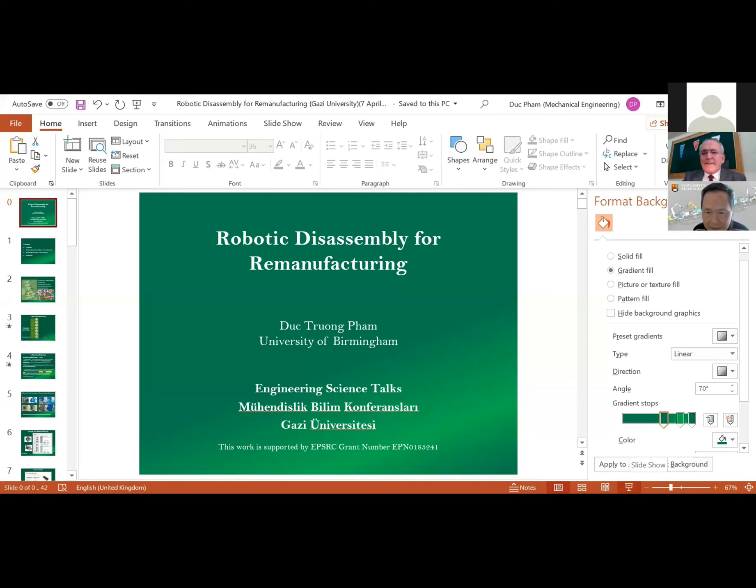Thank you, very good. I'd like to start sharing now the screen. Please bear with me. So this is the one, and I need to be sure that I also share the sound. Okay, that's good. Now share. Can you see my screen yet? Yep. Okay, I will make it large now. Takes a bit of time. Can you see it now? Yeah, fantastic, thank you.

Merhaba, I still remember some Turkish. Merhaba, dear Professor. Thank you very much for asking me to make this presentation, Sharif. It's my pleasure to speak to you and your faculty.

The presentation is quite a simple one. Let me just tell you the structure. I don't know why it is not moving.

Let me see, I don't know. It seems, yeah, there we are. So it has 4 parts. The introduction is very brief, the preamble is very brief. Then I start to explain what remanufacturing is, and very briefly what smart remanufacturing is. Then I talk about the project we've been working on, to do with robotic disassembly, and I'll explain the relationship between that project and remanufacturing, and then finally conclude. I've given about 40 to 45 minutes for the presentation, as Sharif explained to me before, so if I exceed this time, please stop me. Yeah, thank you, very good.

So let me see, I will also start the clock. I have a clock, yeah, there we are. Right, so it seems that my presentation seems to be stuck a bit. I don't know why. Yeah.

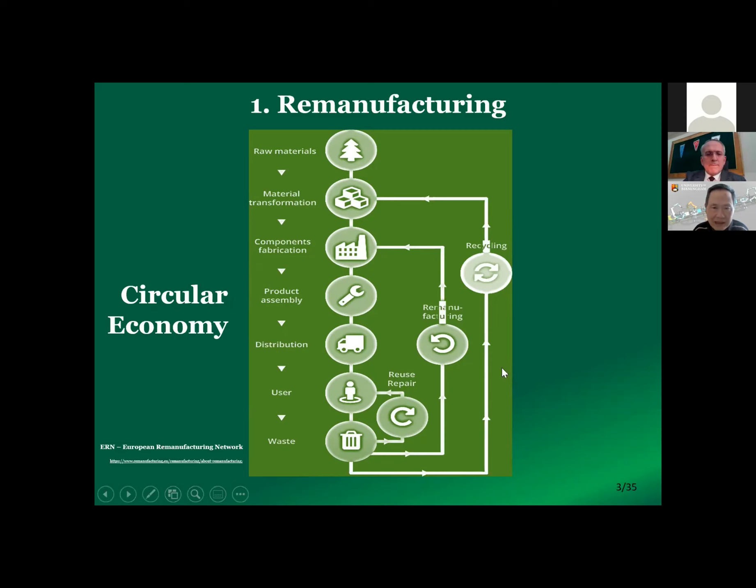So what is remanufacturing? This is the definition in the British Standard: it is the process of returning a product to at least its original performance, with a warranty that is equivalent to or even better than that of the newly manufactured product.

This is not what you're probably familiar with, which is reconditioning. When you recondition a product, you bring it to a working condition, but it won't necessarily be as good as a new product. Here, you bring the product to at least as good as new.

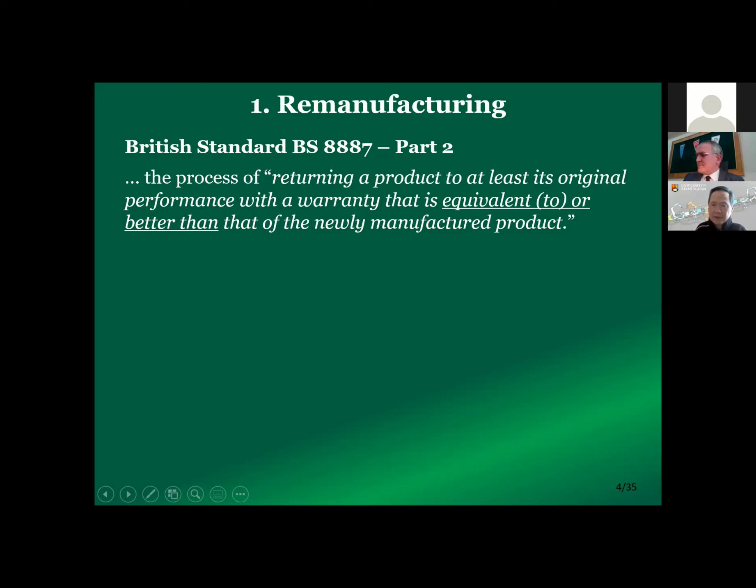This is another definition of remanufacturing according to the American standard. It says like new or better than new. These are the highlighted words: like new or better than new.

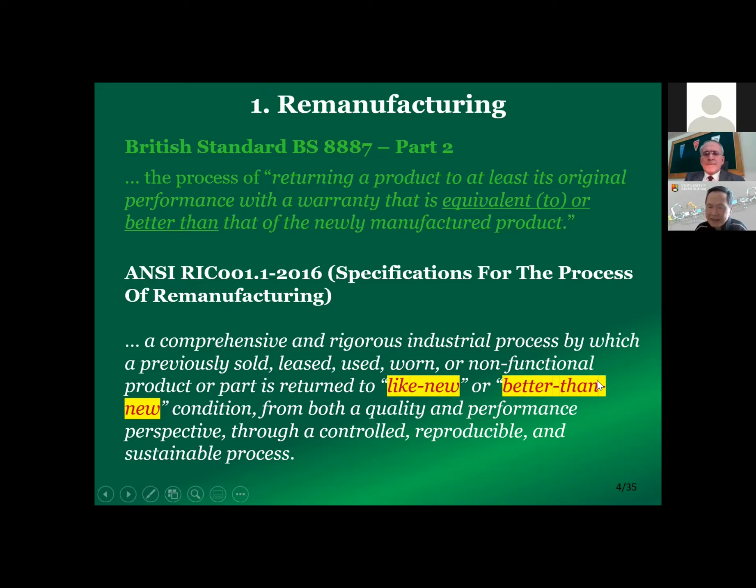So here are some examples of remanufactured products. We have a piece of pipe here, and after remanufacture, it becomes like this - it looks like new. Here, another piece of equipment as new, a pump as new, and so on. A piece of electronic equipment as new.

Or maybe inside you have a new processor, a processor that is of a new standard. Instead of an i5, now you have an i7 chip, and therefore this product is better than the original product that had the i5 chip in it. Some people might wonder why a remanufactured product can be better than the original. Well, it's better because some components in it are better than the original components.

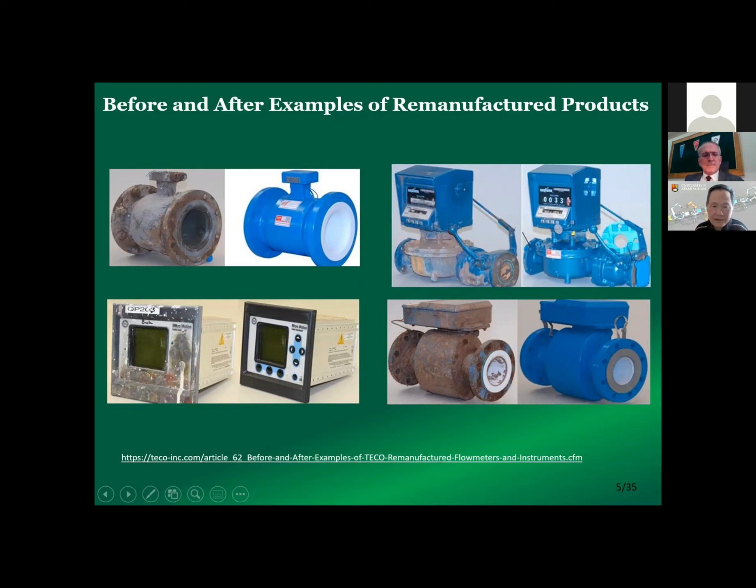So why do we want to do remanufacturing? We heard a little bit about it before, but here is some statistics for you.

This is some data taken from a book by Steinhilper, written just over 20 years ago. He compared the energy required when remanufacturing alternators and manufacturing alternators from new. If manufacturing an alternator from new requires 100% of energy, then remanufacturing only requires 14%, or even 9% in some cases. Alternators are 14%, starter motors are 9%.

In terms of material consumption, if raw materials to produce new alternators or new starter motors represent 100% of the material, then in remanufacturing you only need 12%, or 11% in the case of starters - let's say around 10%. So a big reduction in energy and in raw material requirement.

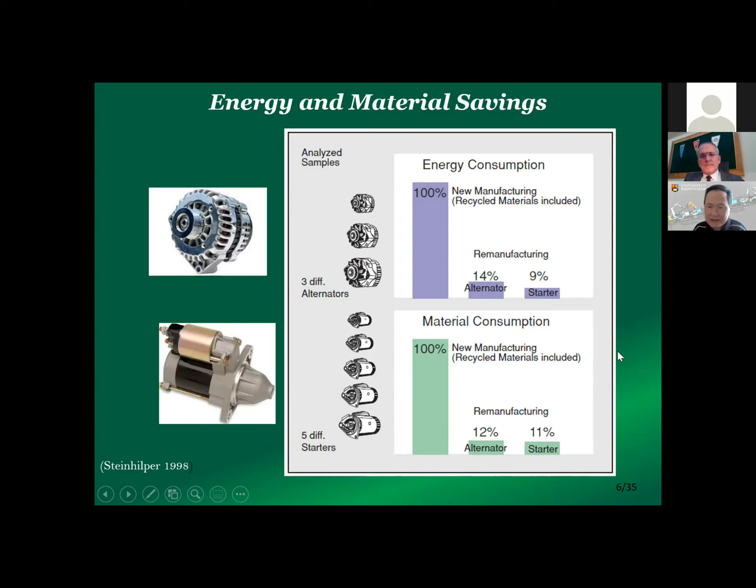Here is a concrete example. Caterpillar is a partner in our project - a big American company making earth-moving equipment and building equipment and so on. You can see the kinds of savings they can make: in terms of water use, 93% less water; energy, more than 80% less; and material, 90% less.

More savings: landfill - normally when you dispose of a product, you have to bury it in the land, you need the land to bury it in. Landfill space needed is now more than 90%, more than 99% less, so you only use 1% of the landfill that is needed. In terms of greenhouse gas emission, 61% less. So a lot of savings for the environment, for resources, and so forth. That makes sense - that's why we need to do remanufacturing.

My thing is stuck again. I don't know why, Sharif.

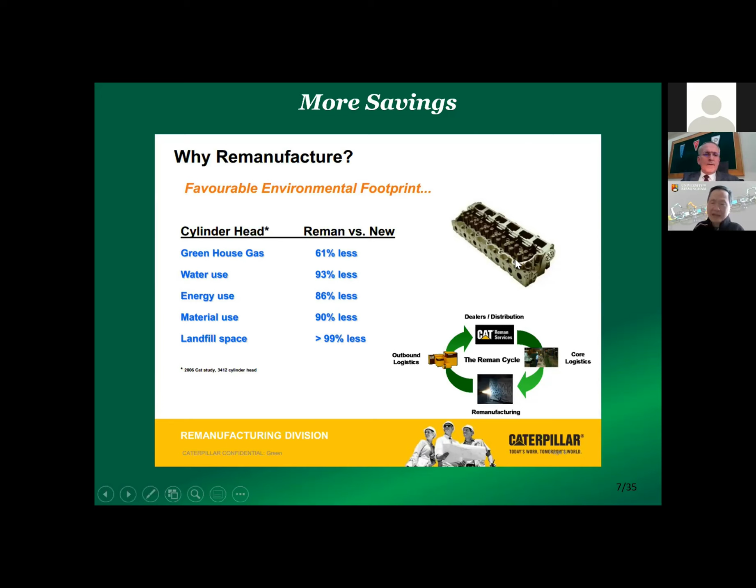So I will look at some issues in remanufacturing. The key issue, as I mentioned, is uncertainties. There's supply uncertainty - you don't know the quality of the product you bring back, you don't know the quantity, you don't know how many motors are coming back today or tomorrow, and you don't know the timing, whether they come this month or next month. You don't know at all.

This is a problem for remanufacturing, because you don't know the condition of these products, you don't know how much effort you need to repair or remanufacture them, you don't know the time required, so you cannot estimate when the new remanufactured product will be available. You don't know how much it will cost, because that depends on the remanufacturing effort - if you need to put a lot of time in or replace a lot of components, the remanufactured product will cost more. So all that poses problems for remanufacturing.

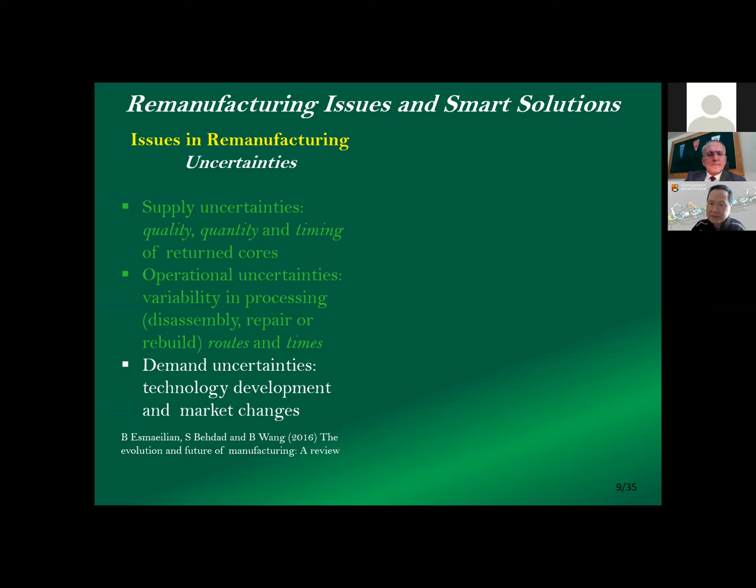Now, smart remanufacturing is about overcoming these uncertainties. You can overcome them by using sensors - you embed sensors in products to monitor the condition of the product continuously during its use. Because of that, you know when the product will come near the end of its life, so you can predict the life of the product and when it will become available for remanufacturing.

And then you have also a complete record of the life cycle of the product, how it has been used. Therefore you can know that certain bearings will need to change, certain components will need to be repaired, a shaft is nearly broken and you need to repair or replace it. So this reduces uncertainties and makes life easier for remanufacturers.

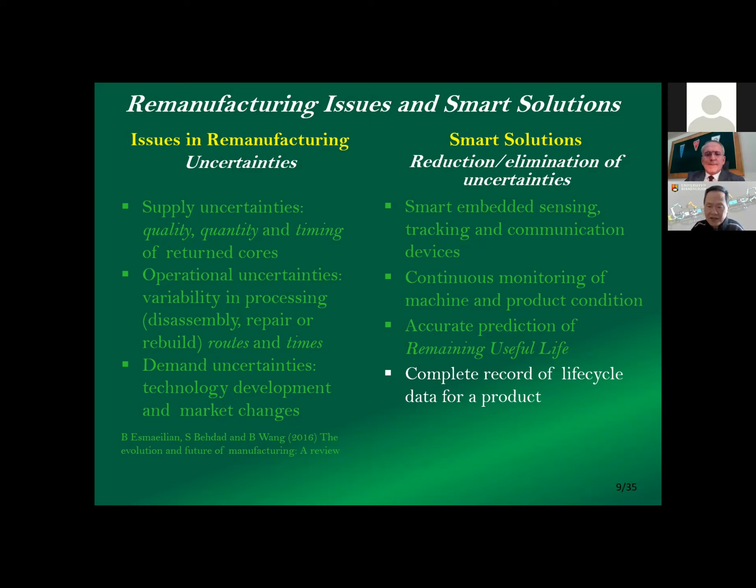Now let's look into a typical remanufacturing process. Here is the end-of-life product, the product that has reached the end of its life. The first operation that happens is that the product is disassembled. You take it apart, you break it down, then you clean it thoroughly, then you inspect the different components.

Then those components that are repairable, you repair them. Let's say if there is a bit of wear in the component, you can build it up using additive manufacturing. Or if you cannot repair it, you can replace it with a new component, but hopefully the replacement is not too expensive—you don't have to replace too many components. The most expensive components you can reuse, so that makes life easier and costs less.

Then after you have got all the components, either new, repaired, or completely reused, you can reassemble them. After you have reassembled the product, you test it thoroughly, putting it through the same test regime as a new product would go through. After the test regime, you can dispatch the product for reuse, for people to use—you can sell the product to customers again. At this point, the product is like new and has a warranty as a new product.

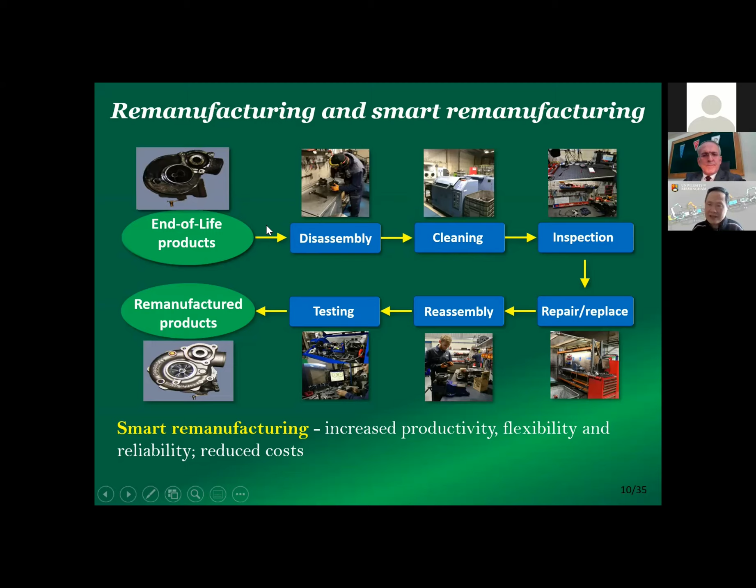I have this slide, and I would like to ask people in the audience to think about it and tell me—let's say Sheriff, can you tell me what I'm trying to show here.

Okay, now I open the microphone. What you are doing—are you assembling, new manufacturing? No, it's just repairing, maybe just replacing or something. Just trying to understand the video.

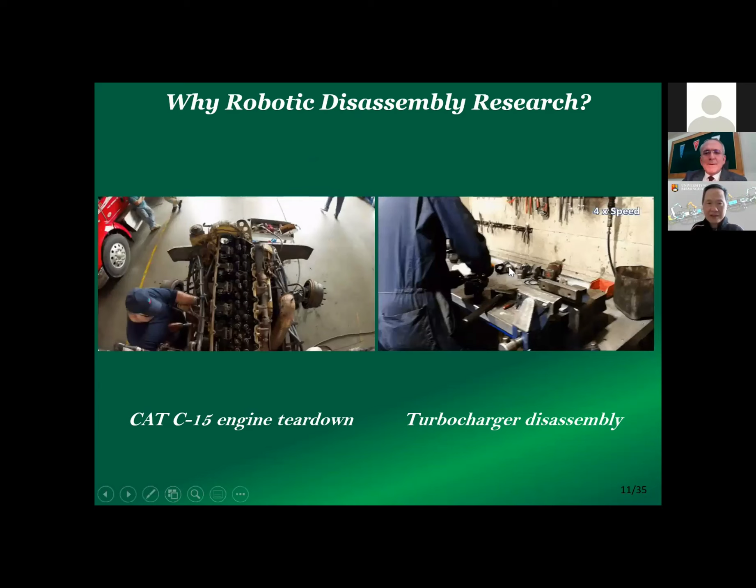Yeah, okay. So I'm showing the disassembly—this person is disassembling a turbocharger. These people are disassembling a big engine, a big engine. You can see the size of the people compared to the engine, and you can see that this requires a lot of effort, a lot of manual work, a lot of people, a lot of effort. This is very skilled—the person does a very skilled job.

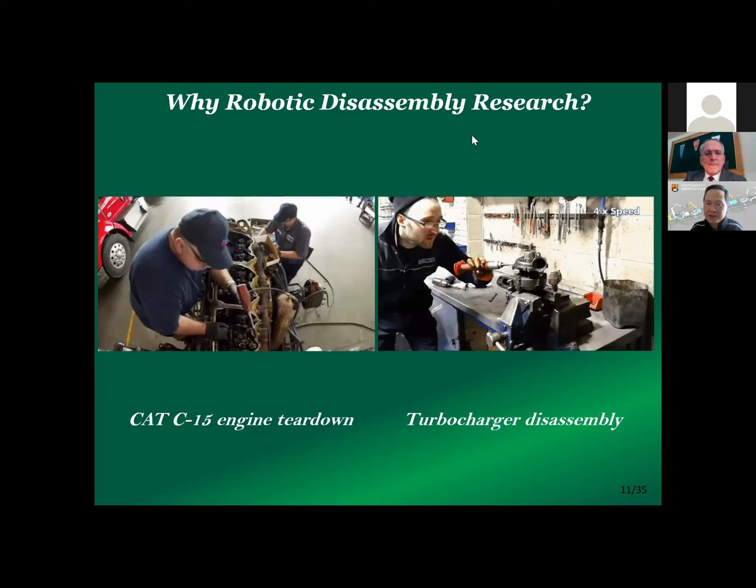So disassembly is a difficult operation that requires a lot of manual labor. This is what makes remanufacturing currently not completely automatable—you cannot automate disassembly, you cannot make remanufacturing autonomous. Our research program, called Auto Reman, stands for Autonomous Remanufacture, and we address the problem of disassembly—the problem shown on the previous slide, with a lot of people being used and a lot of skills being required.

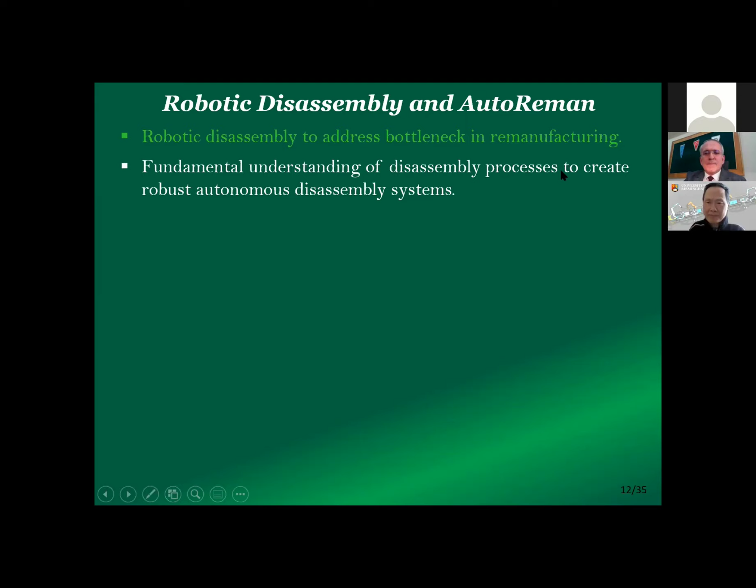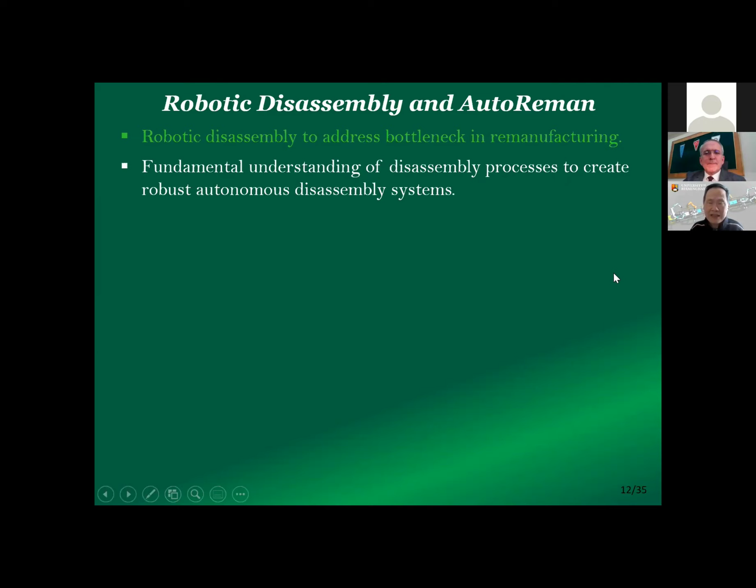This is a 5-year project, and we adopt a fundamental approach to it—we want to study the science. This is why this talk fits your series, which is engineering science talks. We are talking about developing the science of disassembly, to understand disassembly fully. We adopt a scientific approach to studying the problem of disassembly in remanufacturing, and our project is called Autonomous Remanufacturing, or Auto Reman.

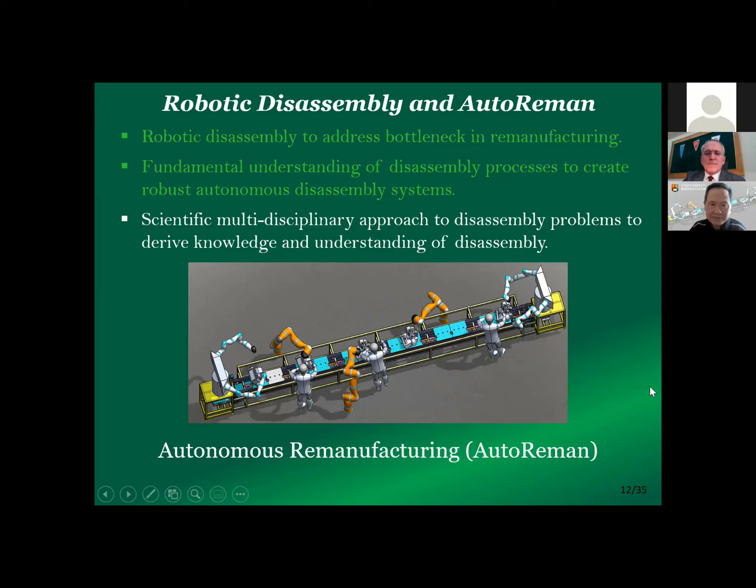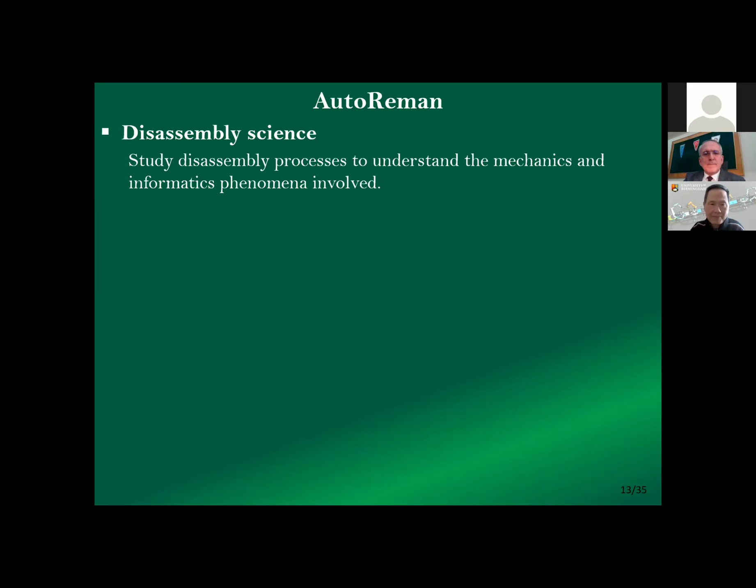So the first step of the project is to understand disassembly. To look at disassembly science, we study the individual disassembly processes to understand the informatics, the information content, and the mechanics involved. We get this understanding in order to develop practical disassembly strategies—strategies that can enable robots to perform disassembly in a reliable manner.

Because we want to have autonomous remanufacturing, we want robots to be able to plan their operations. So we study disassembly planning by robots. Now, in some cases, the original plan doesn't work, so the plan has to be done online. Replanning has to happen. If the robot is working and it finds that it gets stuck, then it has to replan the operation. So we study planning and replanning as well.

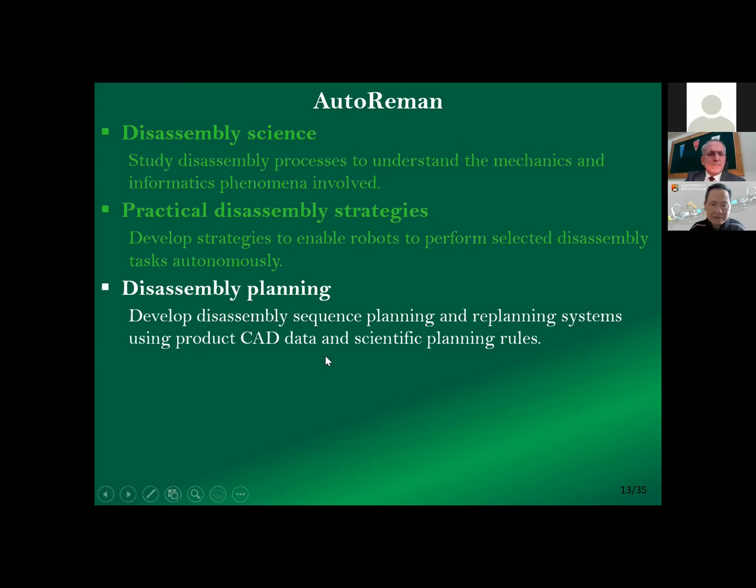It's stuck again. So collaborative disassembly. We realize that with a lot of effort, you can achieve totally autonomous disassembly, but it will cost a lot of money. So collaboration between humans and robots is necessary from an economic point of view, at least. And in some other cases, obviously, you can use robots to replace people in dangerous situations. I will return to this shortly.

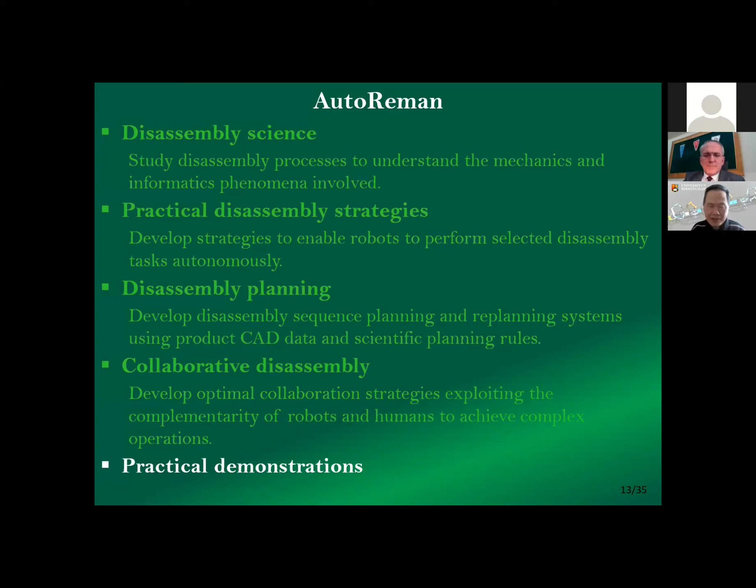But these are the 4 main parts of our project. The final part is to construct demonstrations of the strategies, techniques and tools that we developed in the previous 4 work packages. So here are the 5 work packages of our project. Our project is a 5-year project. It started almost 5 years ago, and it is in the final year. There are 6 more months to go, and I'm going to describe to you what we have achieved so far.

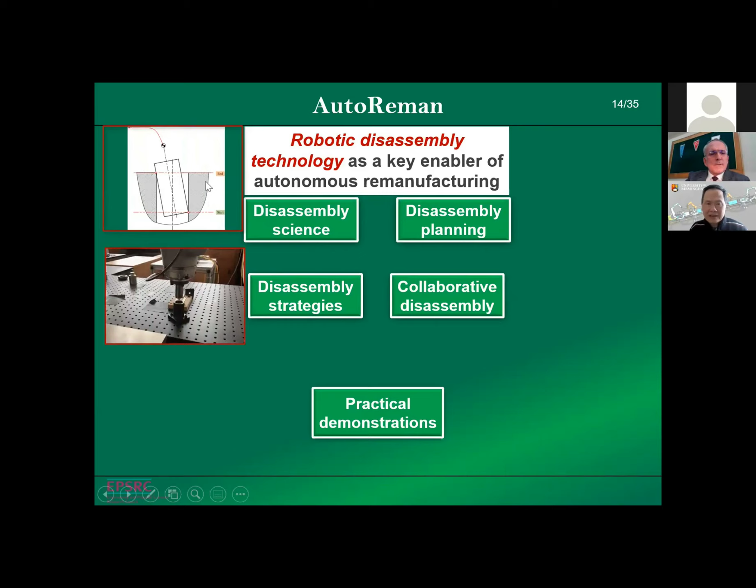So we have been studying disassembly science. We have been looking at individual disassembly processes to understand the mechanics of the processes and also the information content of these processes. We have used our understanding to develop strategies to enable robots to perform those individual disassembly operations. And as I mentioned, we've also been studying disassembly planning.

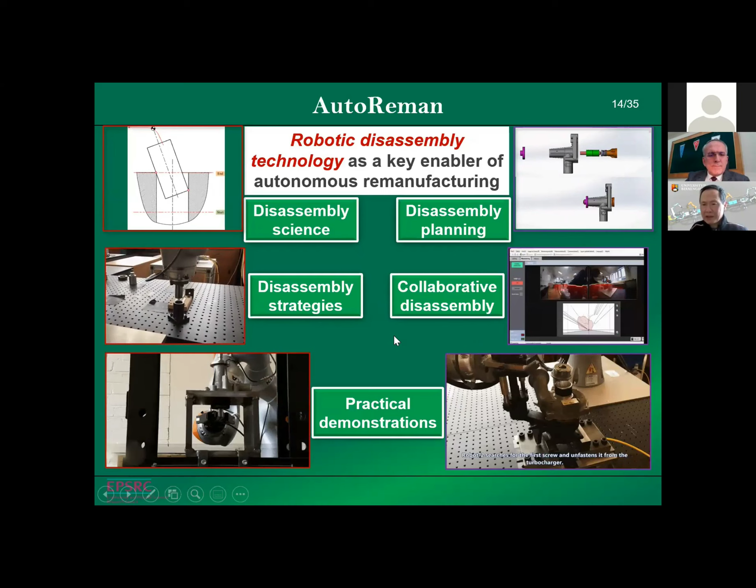Collaborative disassembly is the next piece of work. So when people and robots work together, we look at that. And then we have constructed demonstrations of our work. So I'm going to say a few words about each of these work packages.

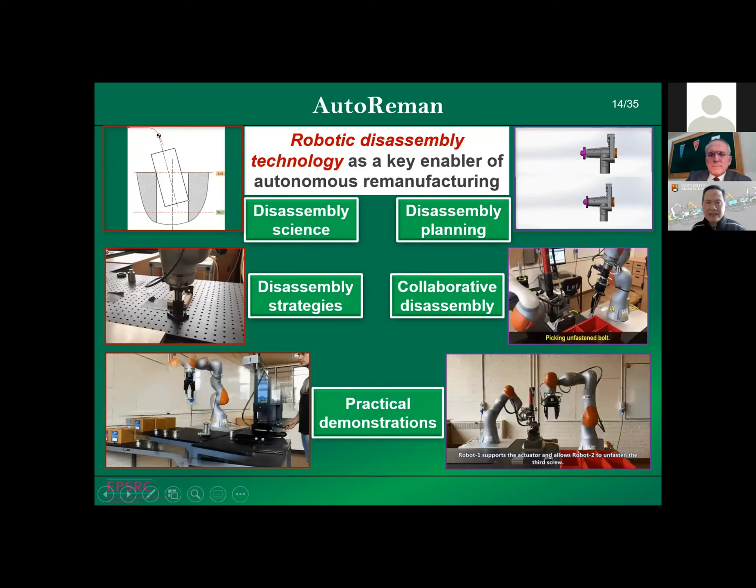Before we started the disassembly science work package, we needed to identify the fundamental disassembly operations. So we studied many products, in total more than 400 products, to see how they are disassembled and what operations are involved. So we found something like 12,000 operations.

And then we classified those operations into categories. Unsurprisingly, we found that unscrewing is the largest category. About 40% of operations involve unscrewing of some sort. So unscrewing is a fundamental operation that we will study.

We also found separation. Now, separation is a big category, it involves all kinds of operations. But there is another class, 20% of the operations involve pulling. So imagine you have a bearing that is in the housing and you pull the bearing out, pulling it in one direction, or you pull the shaft from a bearing. These operations are known as peg-hole operations. People in robotics have studied peg-hole assembly of a cylindrical peg into a cylindrical hole. Now we look at the pulling of a peg from a hole, like the operation I showed you earlier.

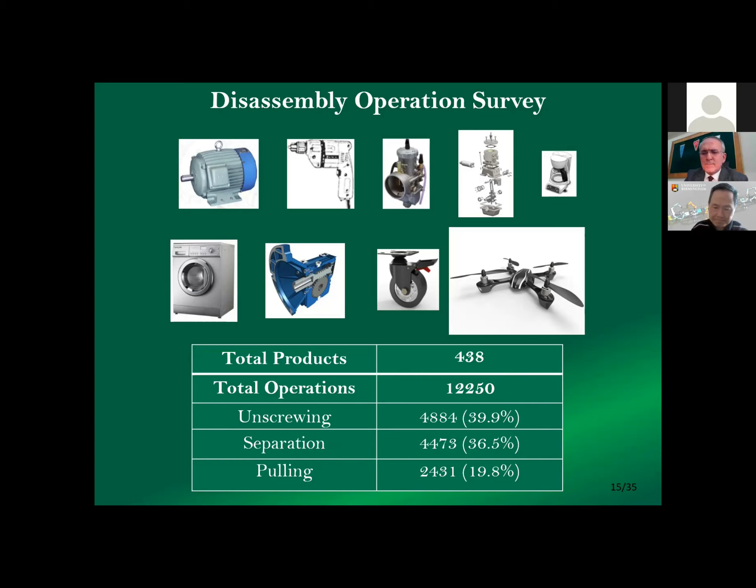We benefit a lot from studies by people who look at screwing as assembly, whereas we are interested in disassembly. When people look at screwing for assembly, they want to screw securely, and they worry about vibrations, you know, when you drive your car, you don't want vibrations to make your wheels loose. So people looked for years at how to make screws that do not loosen when vibrated. In our case, we are interested in using vibrations to loosen the screws. We have a project in this area, and there is a very capable researcher looking into self-loosening processes. He's devising a tool to make the screws loosen by themselves. So this is a part of our work.

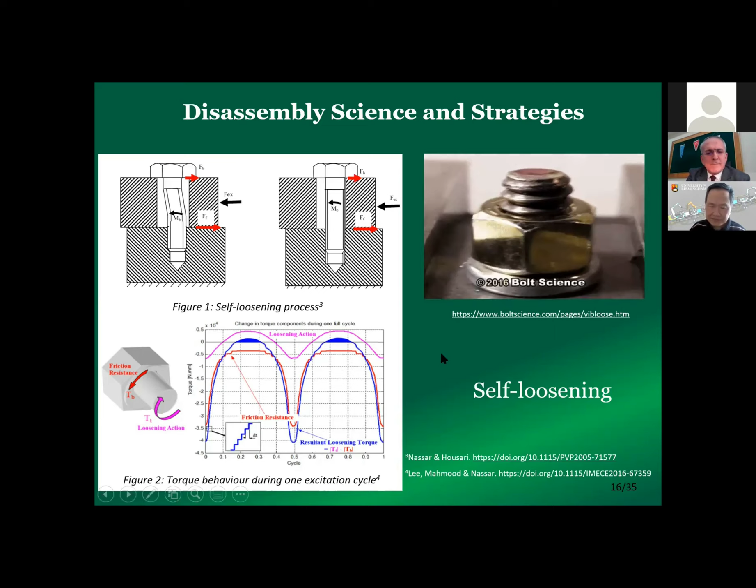Another project in the area of screws is to look at the efforts required to unscrew screws of different conditions. As you saw before, when the product is brought back for remanufacture, the parts are not clean, they are not new, they may be rusty. We have created rusty, rusted components artificially in the lab.

We have looked at what efforts are required to unscrew such components. By putting a bit of lubricant on, you can reduce the effort. But by heating the components, you reduce the effort even more. This is what we have found: the use of heat is very good in unscrewing. The use of lubricants is good, but not as good as heat. If you can apply heat, this is recommended. So this is one finding in our work.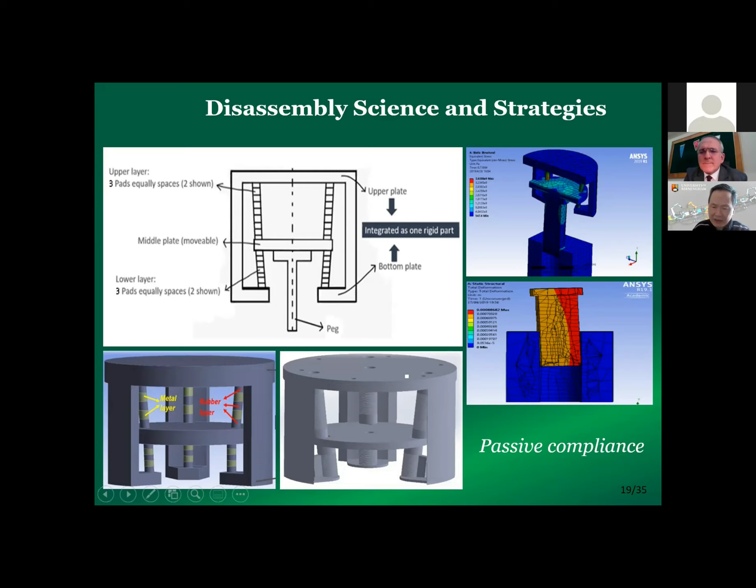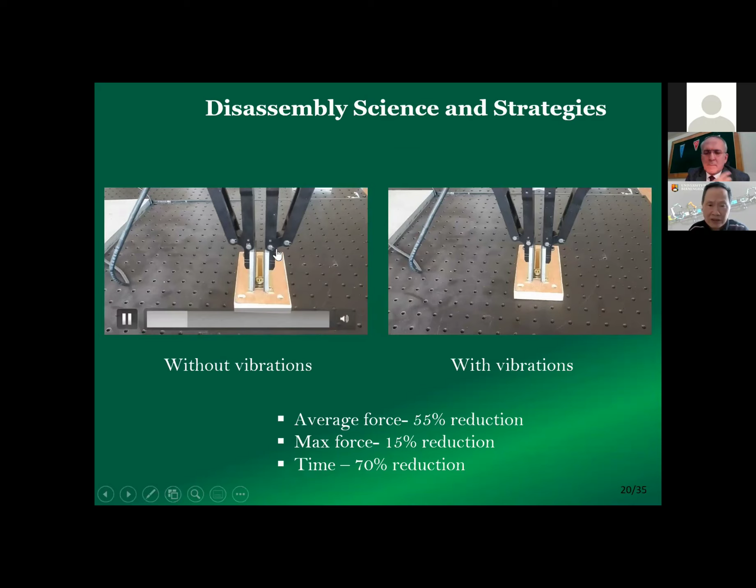Here we look at a pulling operation, but in a different way. We are pulling this pin out of the slot, along the slot. You see the robot here started before, but finished its operation before this one. The one on the left-hand side is still struggling. The difference between the two is that on the right-hand side, we use vibration. So here again, we see the importance of vibration.

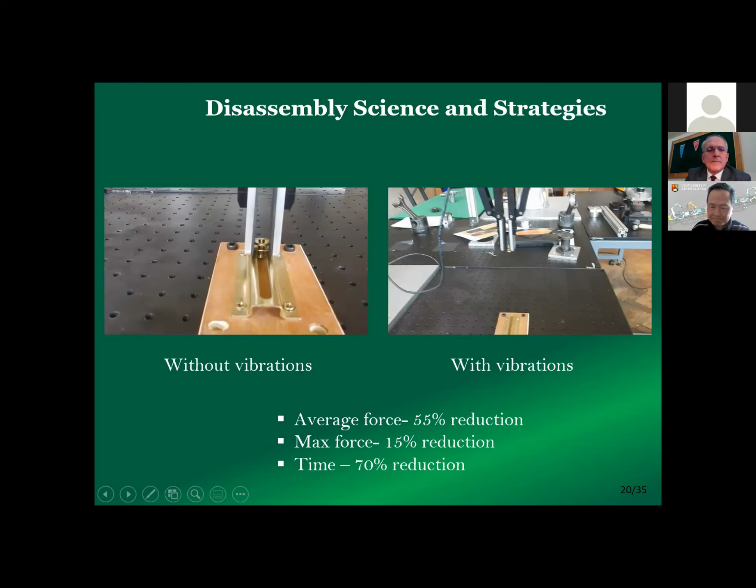Instead of teaching the robot how to perform the operation, we can let the robot learn by itself. Here we let the robot learn the pulling operation by reinforcement learning. I'll illustrate this. At the beginning, the robot fails. It gives up, it gives up after a bit of pulling. But at the end, you can see it has learned how to move the pin along the hole without being taught, by maximizing the reward. There is a reward function, and the robot learns by maximizing the reward.

Now it can do the operation after something like 40 episodes of learning. So, finished. Let's pull it out.

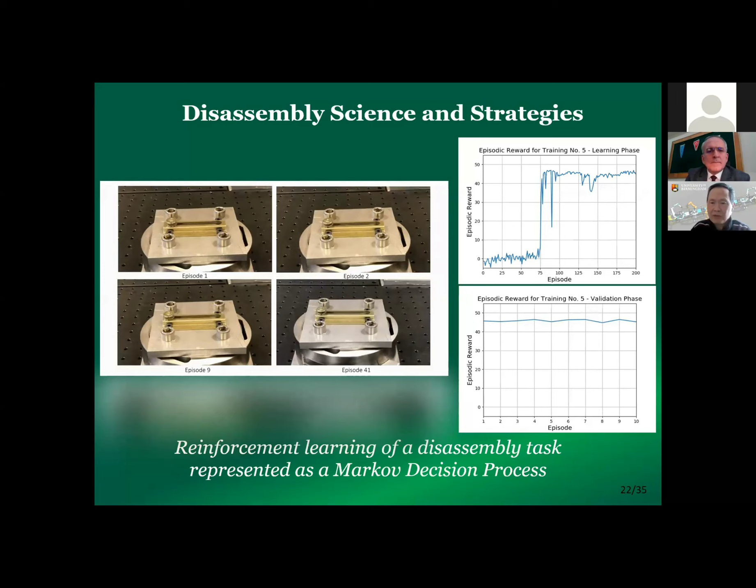Our project involves, as I said, multidisciplinary work: mechanical engineering, manufacturing engineering, computer science. You can see machine learning there. So here is some more mechanical engineering for you, because I come from mechanical engineering.

And you can see that vibration is also helpful. Here we are pushing the pin from the hole, not pulling it, but pushing it, and the pin is locked in the hole because it is press fit. Again, using vibration, you can reduce the effort, and reduce it greatly.

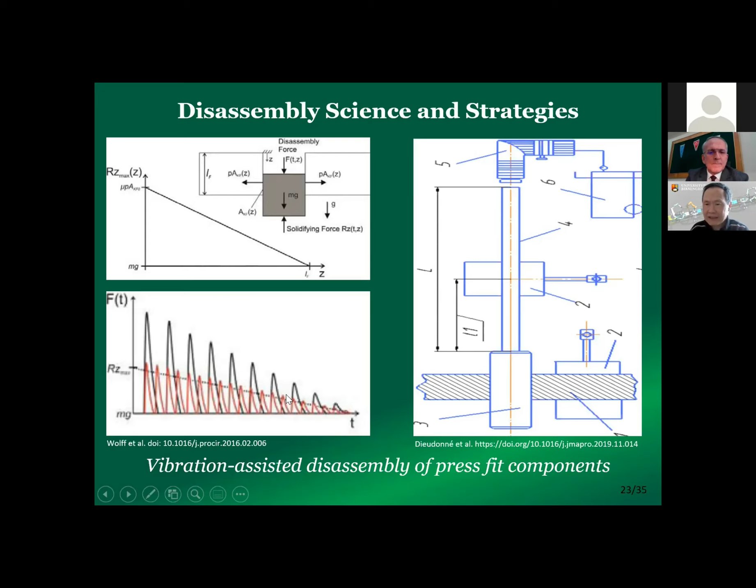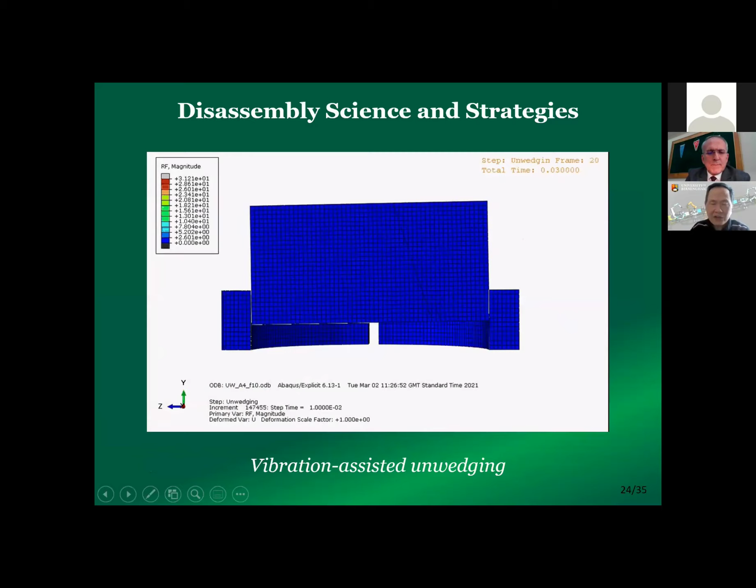Here again, the pin is wedged in the hole, and using vibration, you can unwedge it. You can see, you unwedge the hole after vibrating the pin. So vibration is very helpful in disassembly. It's not helpful for assembly, but very helpful for disassembly.

Collaboration is important to our project because, as I mentioned before, although it is very possible to make robots do the entire disassembly operation, it is not economic to do so because you need a lot of tools and fixtures, and it costs money. So it is good to have human-robot collaboration.

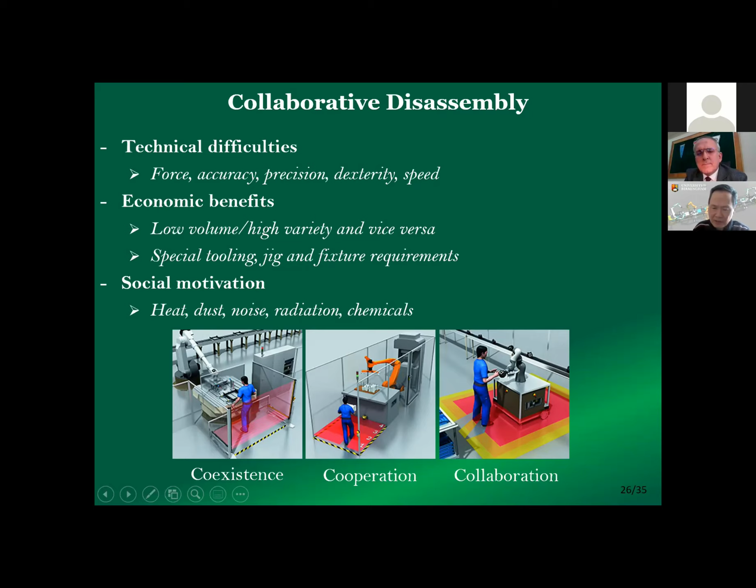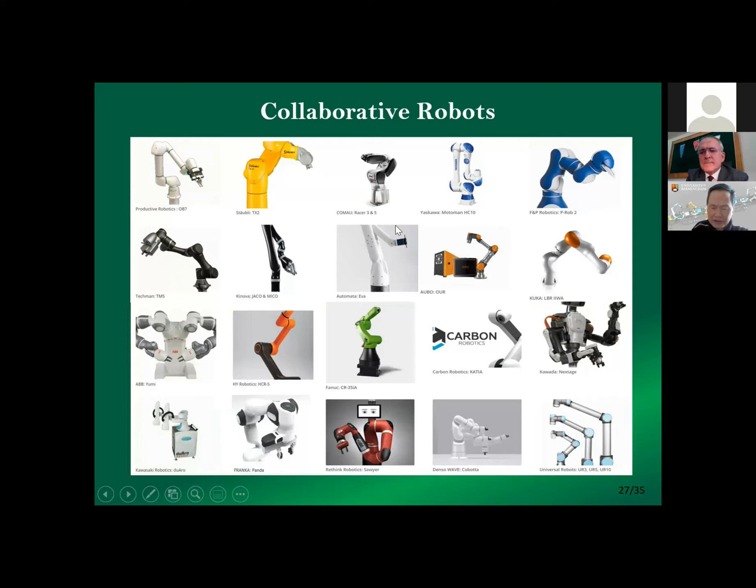Now, this is possible because of the new generation of machines known as cobots. You can buy these cobots now, and they are quite inexpensive compared to previously. You can get cobots that are as cheap as normal industrial robots. So cobots are expected to be used more and more in the future.

Now about our demonstration. We have constructed so far two demonstrations.

One is the disassembly of a water pump. I showed you the water pump before, and in our cell, we have two robots and a person working, and there is a tool here that the person operates. We constructed this demonstration to show human-robot collaboration.

In reality, you may not design a cell in this way. You may be able to construct a completely automated cell, for instance, by automating the press. Here we use only a manual press, and the person operates the press. So this is a press, and it is used because in the part there are some press fit components.

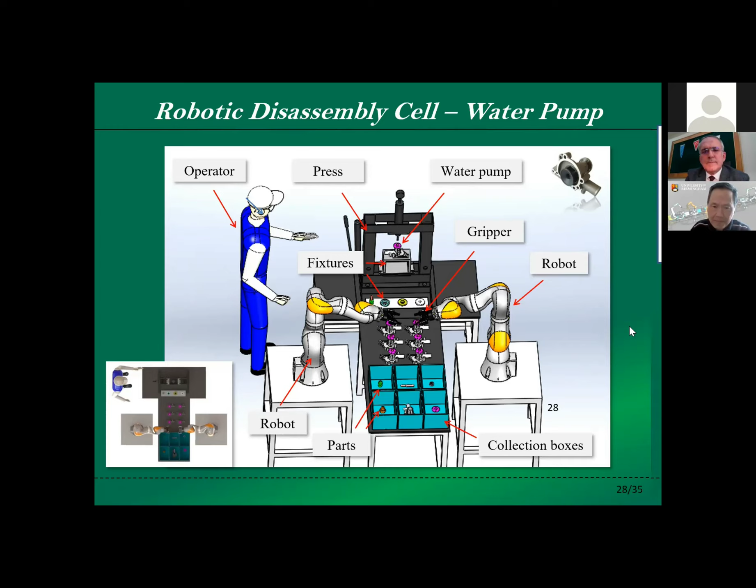So this is a press fit component. This component needs to be pressed out of the holder. You need to use quite a bit of force, and the robot doesn't have that force. Even the human cannot apply this force; it is hundreds of kilograms. So the person has to use a tool, a press machine.

So when the person uses the tool with one hand, they catch the part that comes out. The shaft, when it comes out, is caught by hand. In our case, we use a robot to free the person so that the person doesn't catch it. The robot catches the component to help the person.

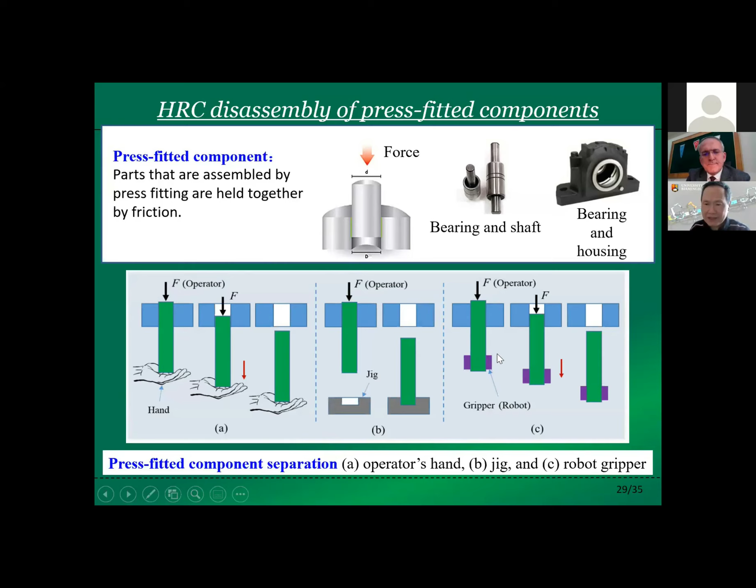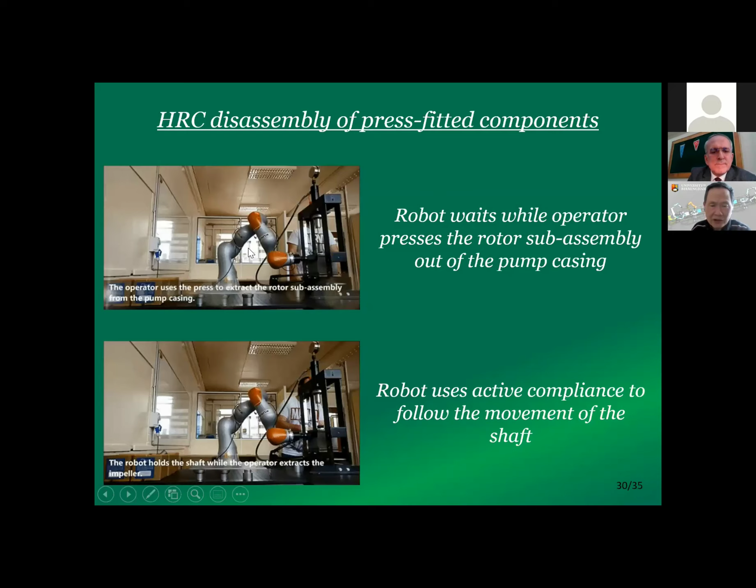So you see the person uses the press, and the robot waits here for the part to come out. You see the person pressing, and the part comes out on top. It touches the hand of the robot. The robot comes up and picks up the part.

So the robot waits. The pressing is done, and then the part comes out gradually. If you focus here, you see it comes out gradually, and then the robot catches it. That was the first case.

The second case is when the robot holds the part. It is holding the part as the pressing is done, and the robot follows the part. It is compliant, able to follow the part as it comes out.

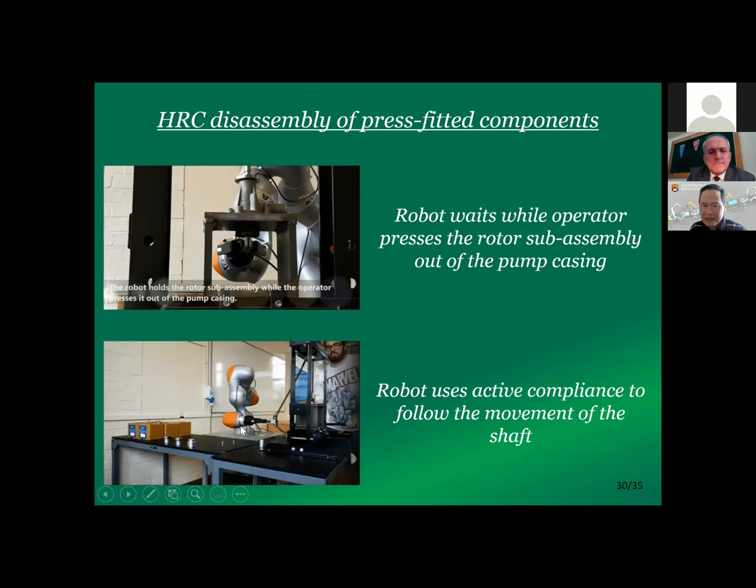Notice again, the part is being pressed, the robot holds the part and it comes out. You can see the hand of the robot going down. If you watch the bottom screen, you see the hand goes down. So there's human-robot collaboration there.

Now there is a 3-minute video that I will not show, but you can find on YouTube. I will show you the link later on.

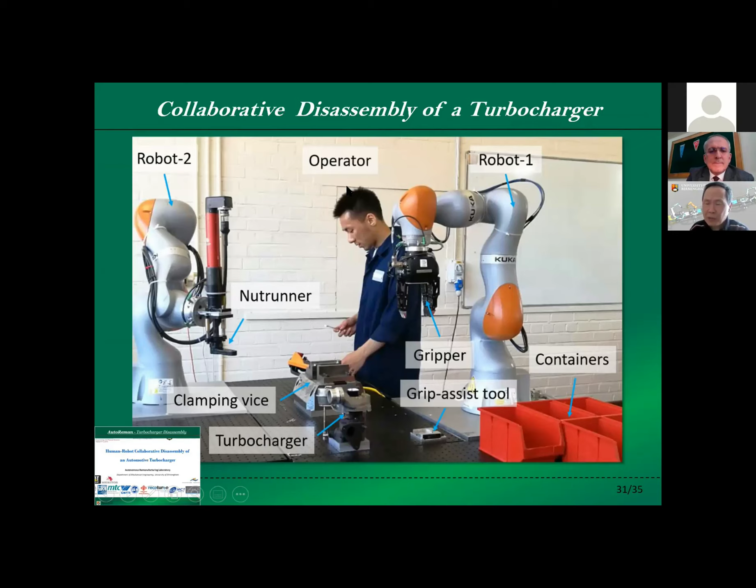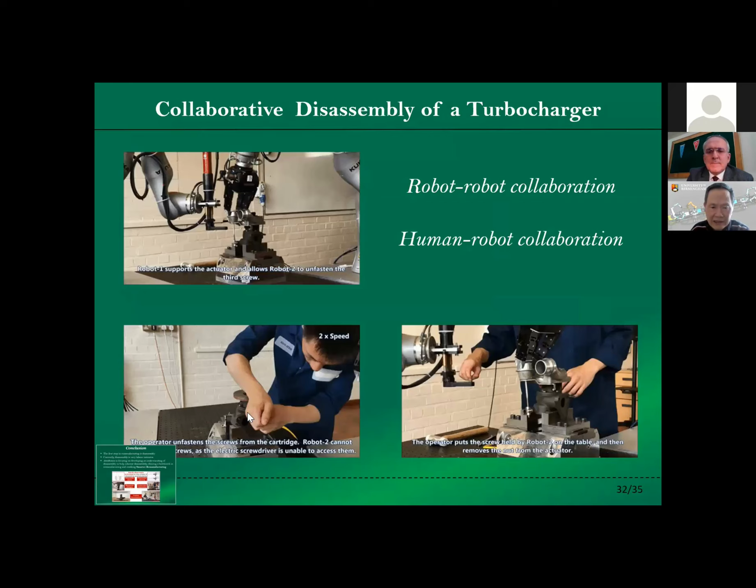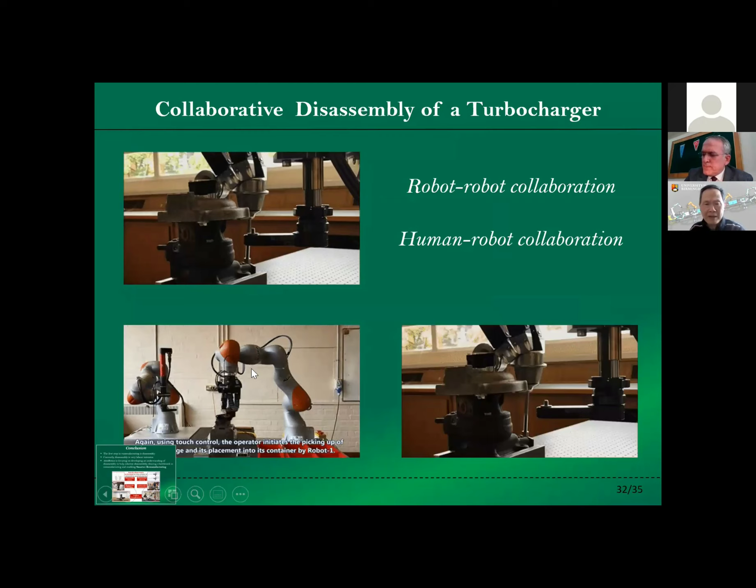Here is another case of human-robot collaboration. You can see the person, the operator, and the two robots. In this case, we are disassembling a turbocharger. The human is involved in working with the robot, and works on tasks that are difficult for the robots to carry out. These tasks are difficult because the robot has a big tool and cannot reach into a small space. The person uses his hands and can reach into the small space and perform the operation, whereas the robot will find it difficult.

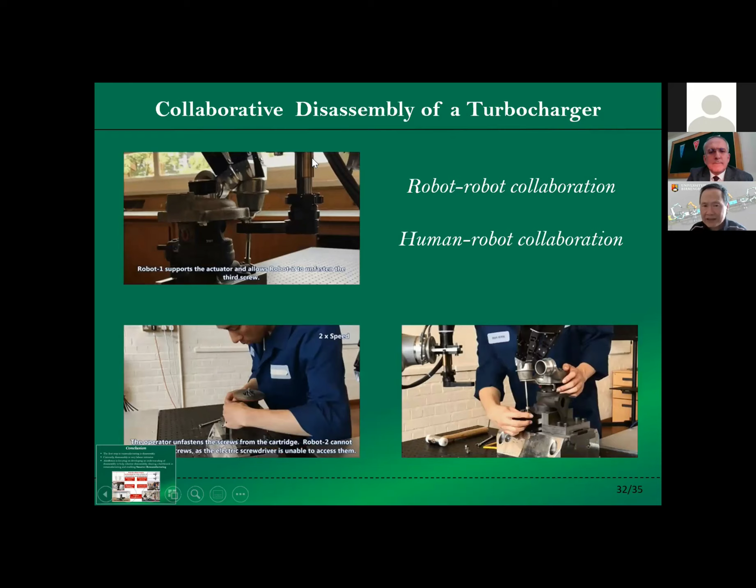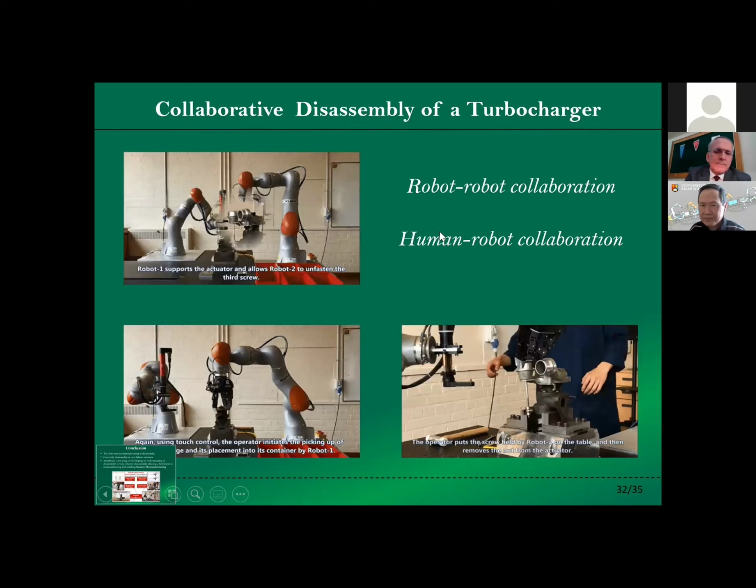On the top diagram you see the two robots working together. So here you have robot collaboration: one robot holding the part while the other robot works on it. The robot here is performing the unscrewing operation, and it searches for the screw using sensors.

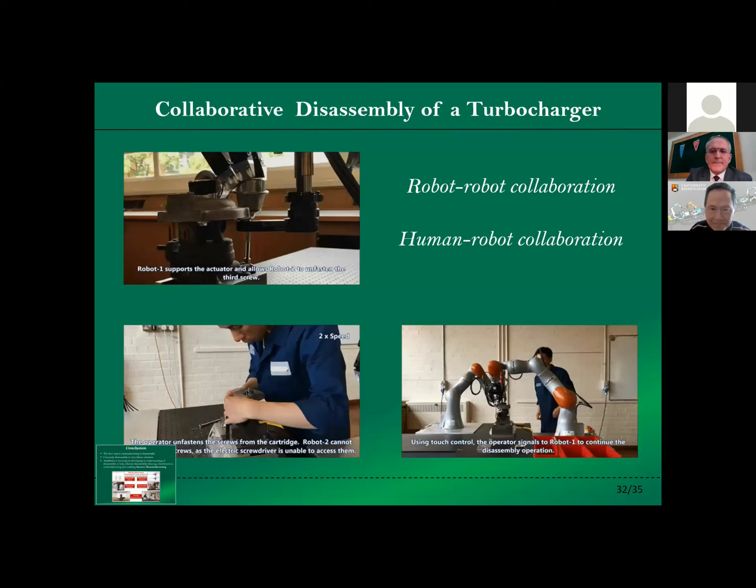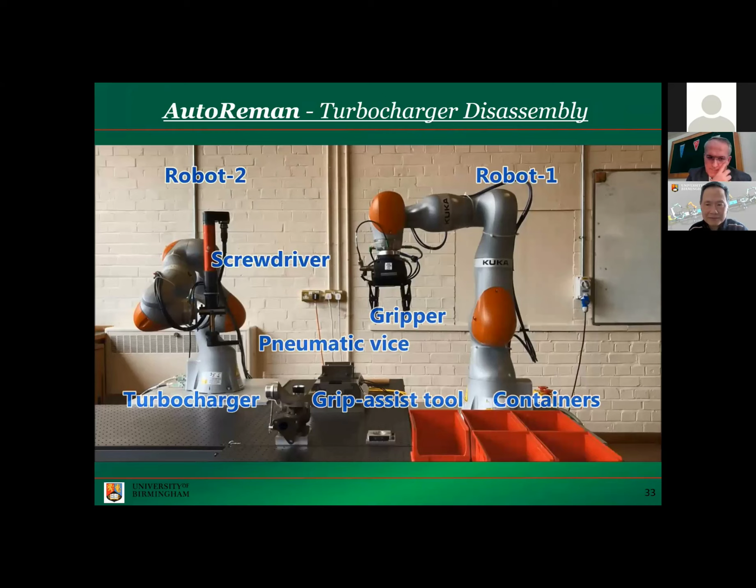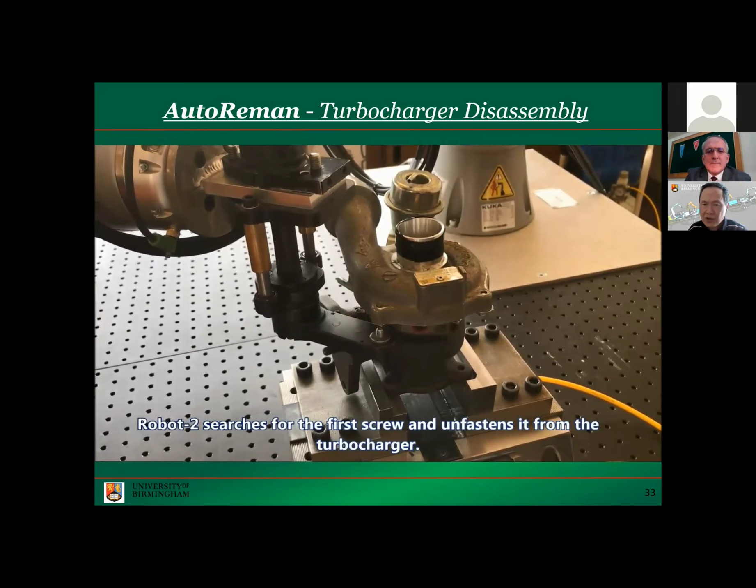The person starts the movement. The robot picks up the turbocharger, puts it in a clamp, and the second robot comes and performs the unscrewing operation. Now you see the robot had to search for the head of the screw. It was not taught the exact position because the exact position is not known, so it had to search for it.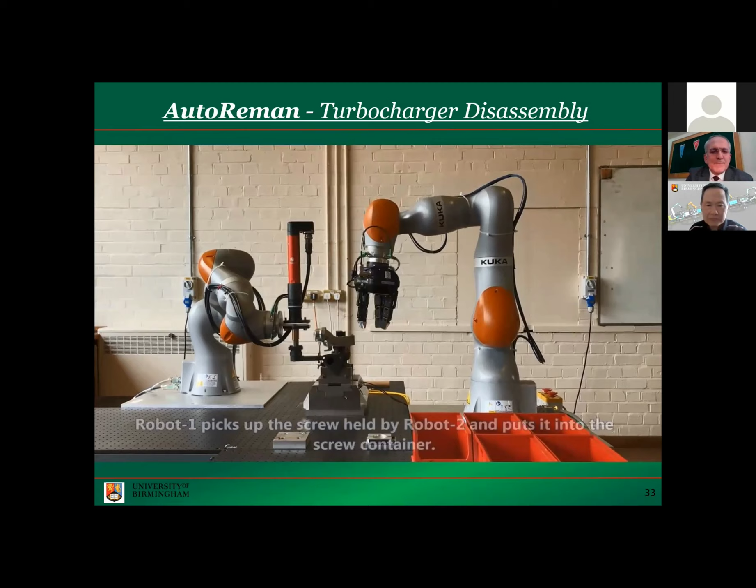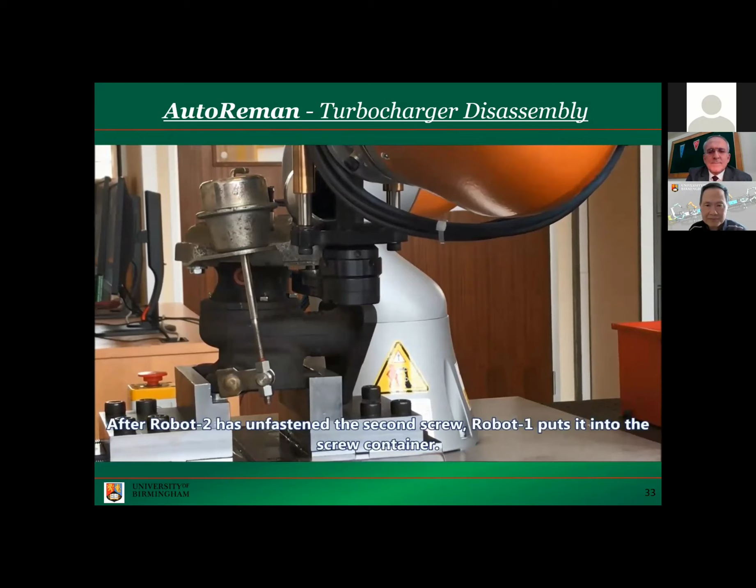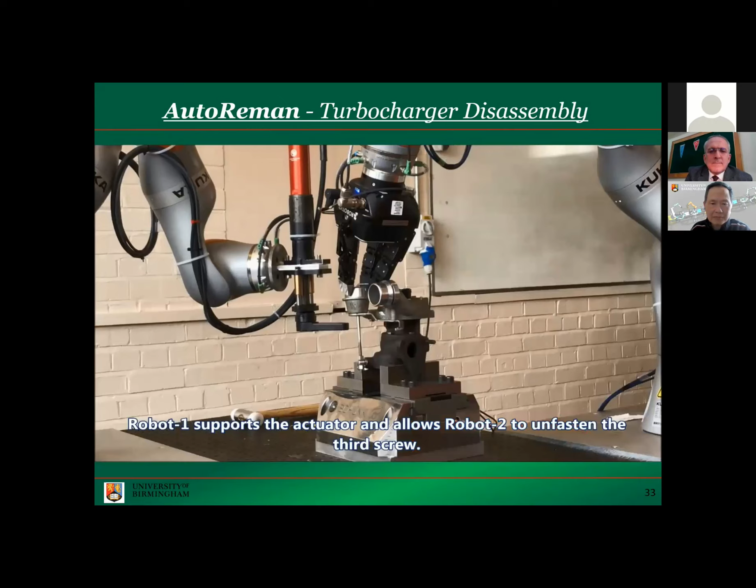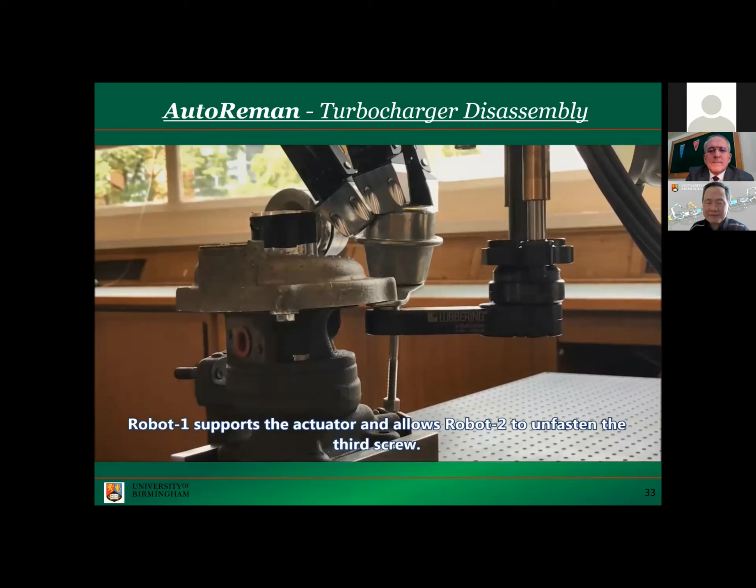You can see the searching operation here. Searching, searching, searching, searching... found it. It performed a spiral search operation. It looked a bit random, but actually it was a spiral search.

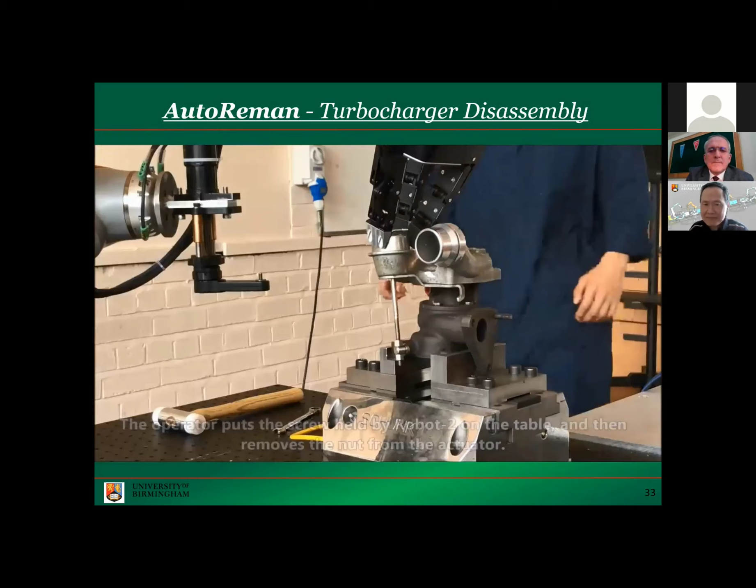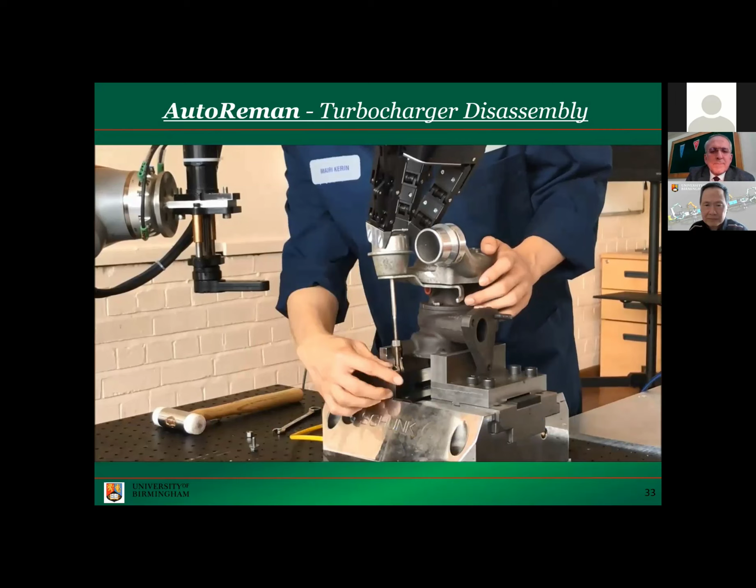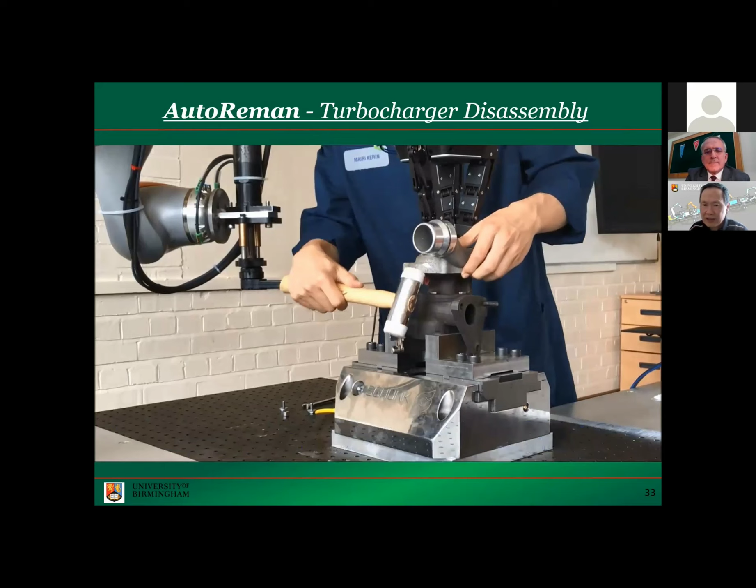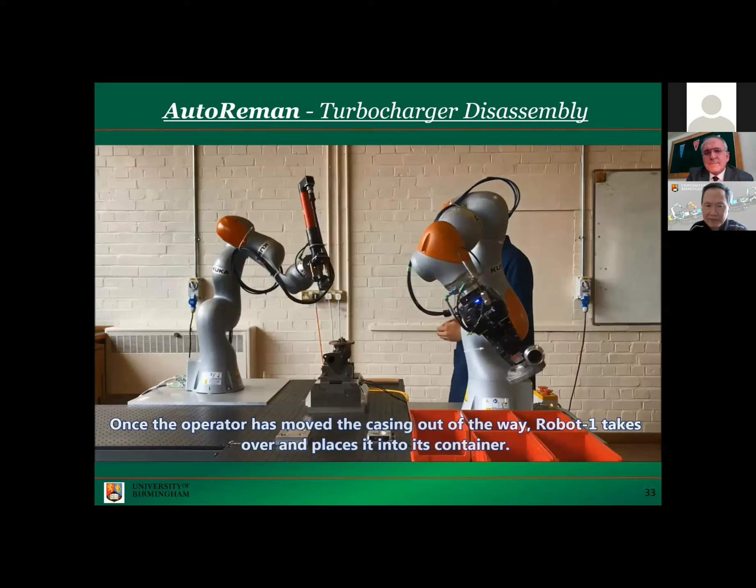Now the person comes in and helps the robot, because some operations are very difficult for the robot to perform. This operation is not easy for the robot either: using a hammer to knock involves an action that's a little bit difficult for the robot, so the person does it instead. And now he goes in and performs some very difficult operations here, because the robot cannot reach these areas, so the person does it.

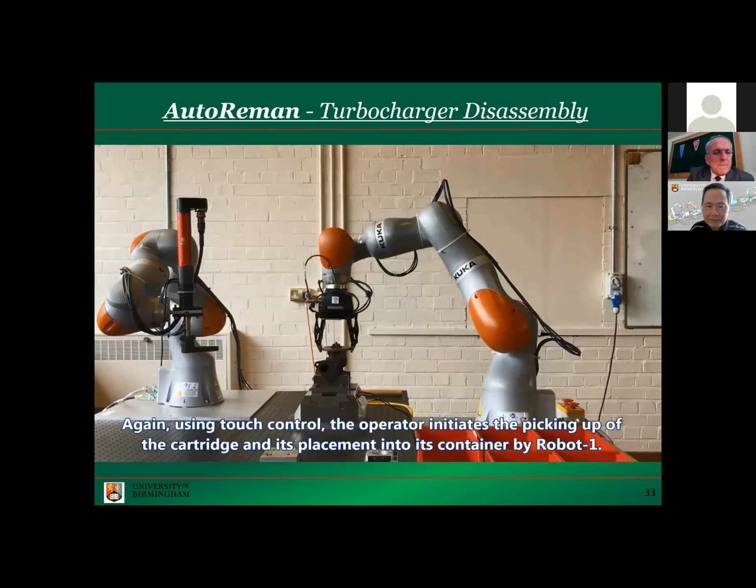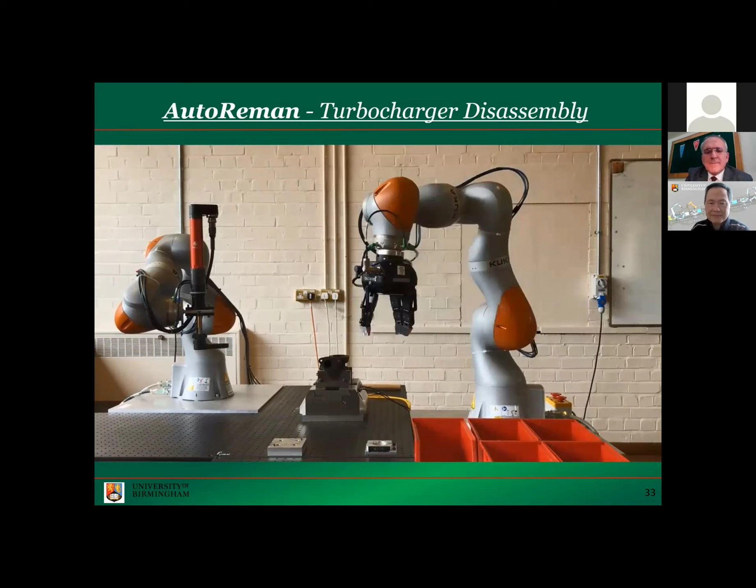So, in conclusion, the first step in remanufacturing is disassembly. As I showed in one of the previous slides, it is a very labor-intensive operation, and also very skilled. Our Auto Reman project focuses on developing a good scientific understanding of disassembly to help robotize the process, clearing the bottleneck that exists in remanufacturing and enabling us to develop smarter remanufacturing.

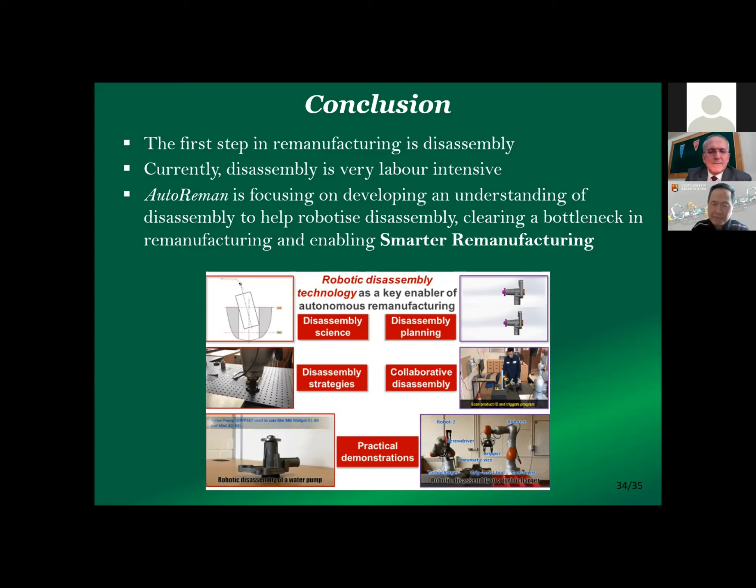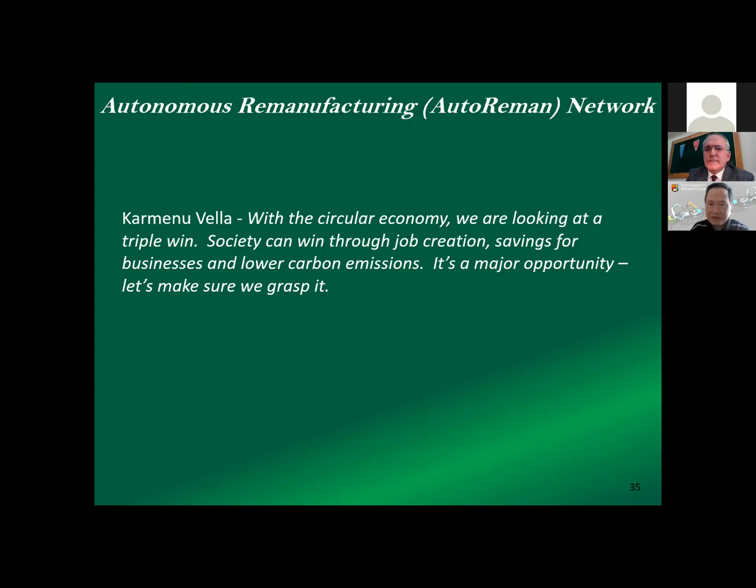Now, we in Birmingham cannot do it alone. We talk about human-robot collaboration—how about human-human collaboration? We want people to work with us in this area, and that's why we have set up a network known as the Auto Reman Network. We invite people all over the world to join us. Our project currently has collaborators from Spain, China, and Germany, but we need more people to work with us in this area. The Auto Reman project finishes this year, but the work on remanufacturing continues for a long time. I started my PhD in this area more than 40 years ago, and I'm still working in this area.

Thank you very much, Sheriff. Thank you. Okay, dear Professor, thank you very much indeed.

Really, you provided us a good, different perspective. We are looking at the industry from the manufacturing side, but you gave us today a different perspective. We have to look also at another perspective from the disassembling side, how it is really a difficult part of the industrial process. Thanks again, and we have some questions—let me read some from people.